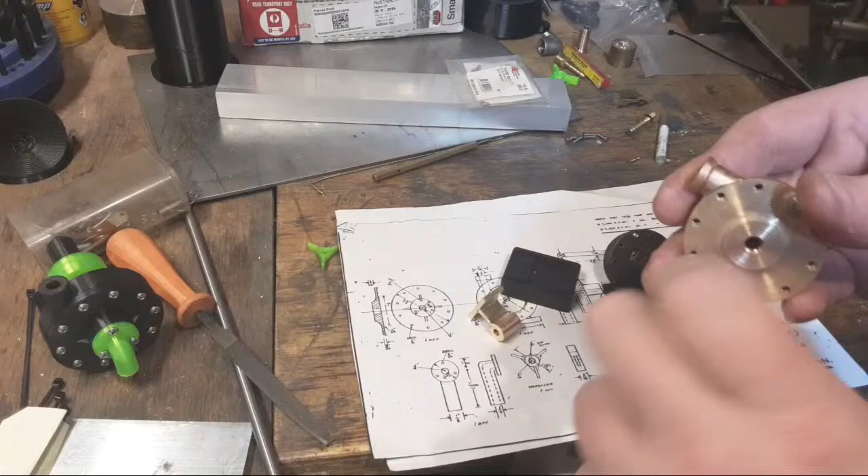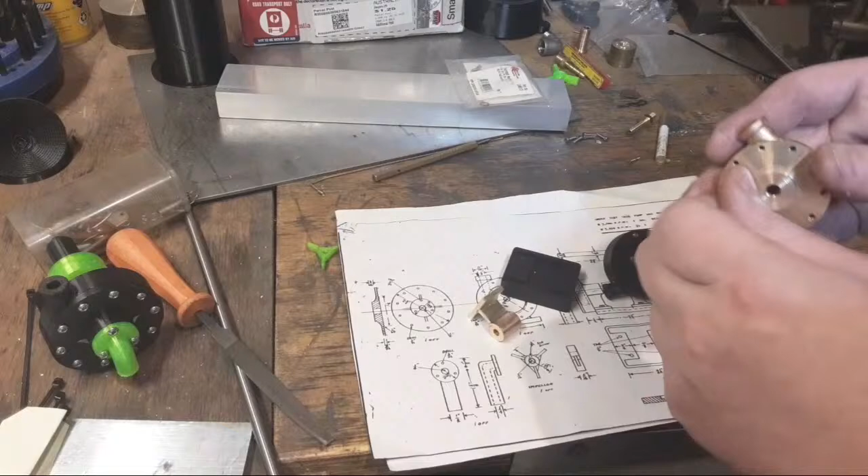Probably could have done this before. Oops, sorry about the bump. So it's got the right cavity and everything in there. I think I ported all that today at work. There's pretty much zero clearance here at the top and the back side of it where the impeller hits.

I hope I've got this right. And there's quite a bit of clearance down here. This hole here was a problem because this is supposed to have 10 holes around it. And in theory that would work if this hole was small enough, but I drilled this hole out quite big to put a fitting in it, and these touched, so what I've actually done is silver soldered a plug in there and then tapped that and ported that down as far as I can. So I think it's all pretty good.

These are all fabricated up. I did manage to get this on the wrong side of the piece of bronze and couldn't be bothered making another one, so I've actually plated that, and it's going to have a bit of JB weld in it and some nice blue paint on it anyway. That's the lid.

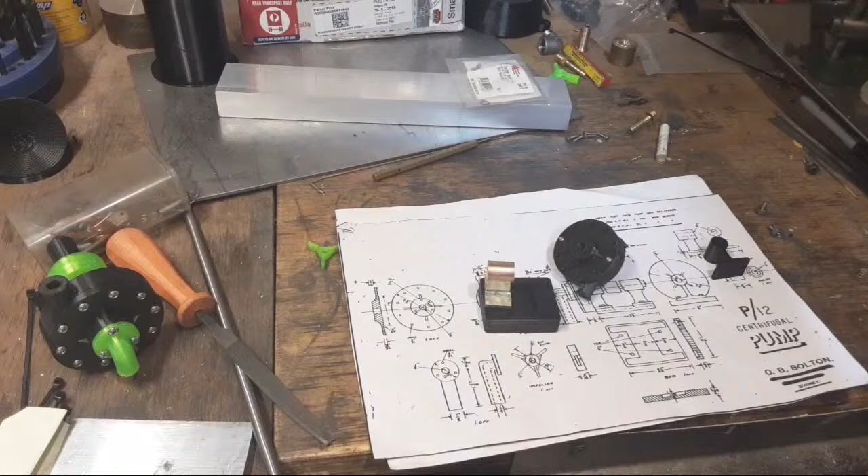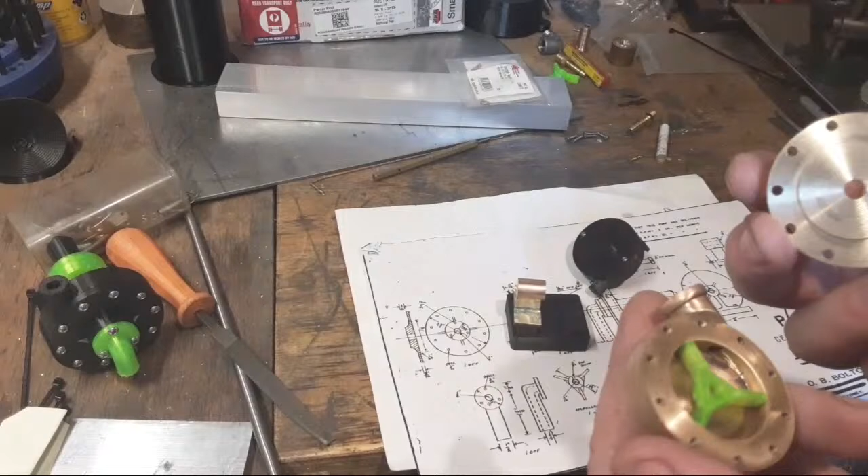Which all lines up. And that's the back standard for it, which hopefully all lines up as well. It goes on a base that looks something like this. It's not actually going to look quite like this. And it's got a pulley in between and a shaft and an impeller, which looks something like this, in bronze, I guess, or stainless steel, probably bronze. That was a good fit in there, so I don't think it'll be that tight, that close, but that's how that looks. It's got a bit of clearance, and this should fit on there like that, and it should suck water through there, I hope, and push it up the pipe. Maybe. If it doesn't, we'll have another think about it.

But that was a weekend's work. This is the P12 pump from OB Bolton in Sydney, or wherever they are now. I don't think they're actually Sydney, but this was their original drawings from the 20s and 30s, and I've scaled this down 3/4 size because as drawn it would have been like this. It's a bit big for this engine. It'd make a nice pump for a steam engine though, really nice.

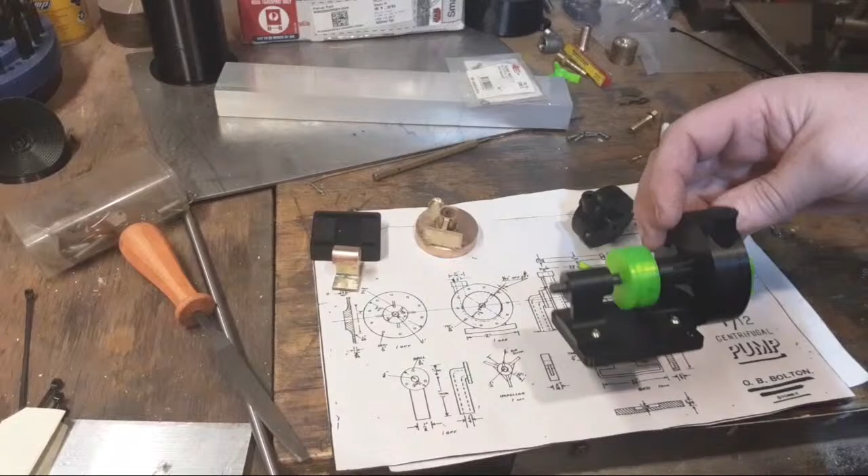Anyway, if you want - it was probably my tummy growling, I haven't actually had dinner yet.

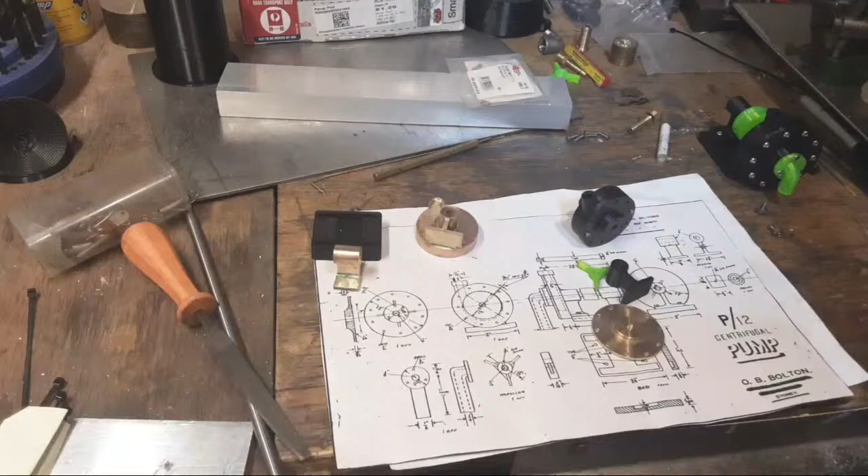Yeah, what was I going to say? Yeah, no idea. That's gone.

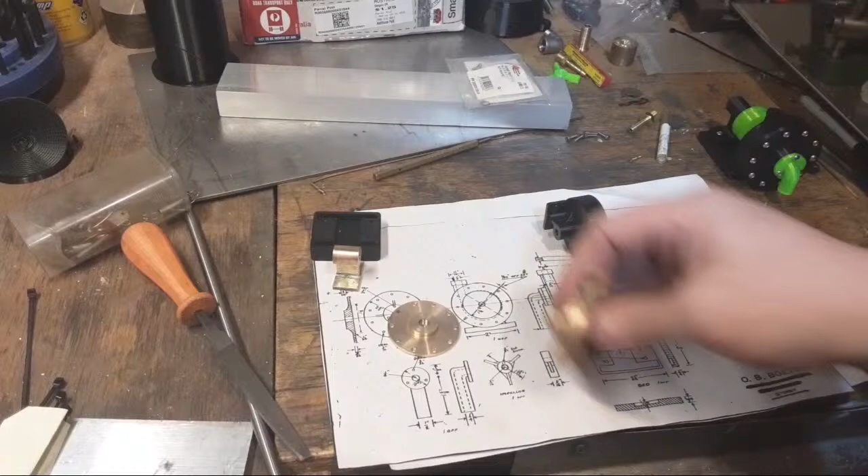Anyway, it's looking all right.

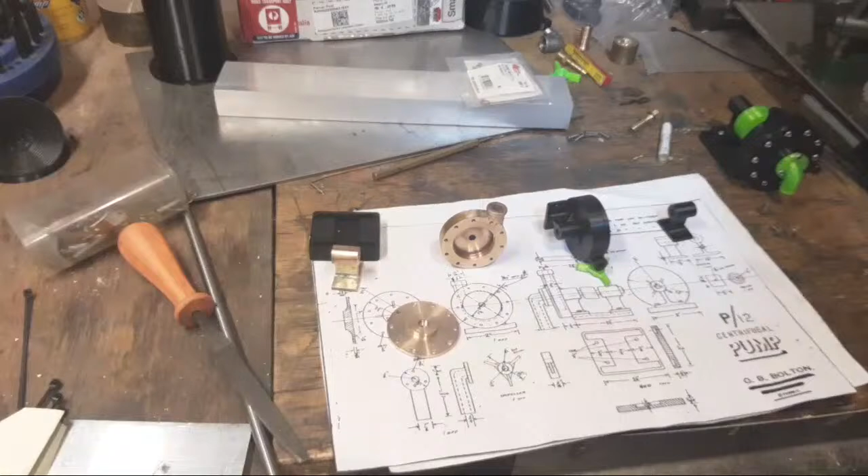So there we go. I'll put the video up on YouTube eventually. These two for the pump I might do a bit quicker than the others actually. We might put them up reasonably soon, we'll see how we go. But that's coming together nice, and that's going to be a really nice little model on its own without putting it on the engine. I hope it works.

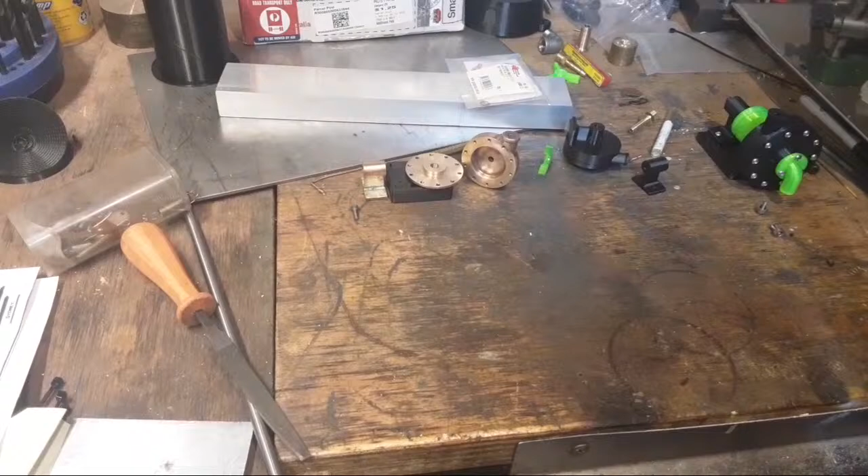Now, Man Cave sent a parcel, right? Road transport only, so you've got to wait for it. It's been a few days, don't know, might have been 10 days, I don't know how long it's been. It came from Melbourne. Sorry about that. And I haven't, to be honest, opened it.

I know Craig got his, because I saw his video.

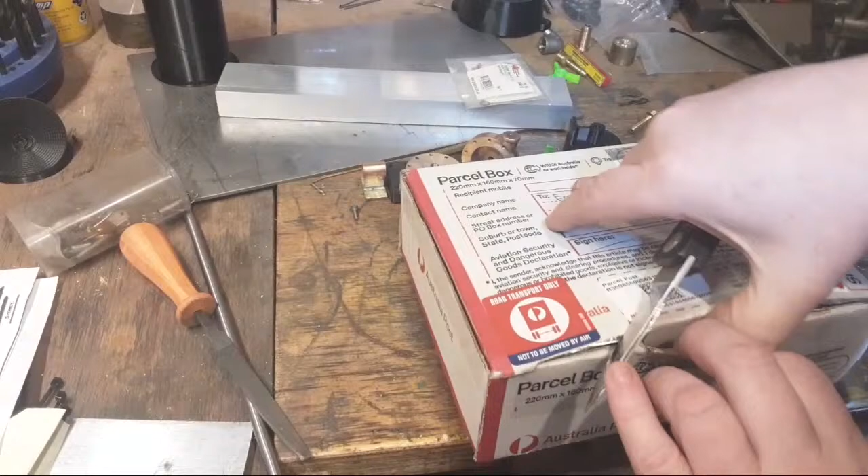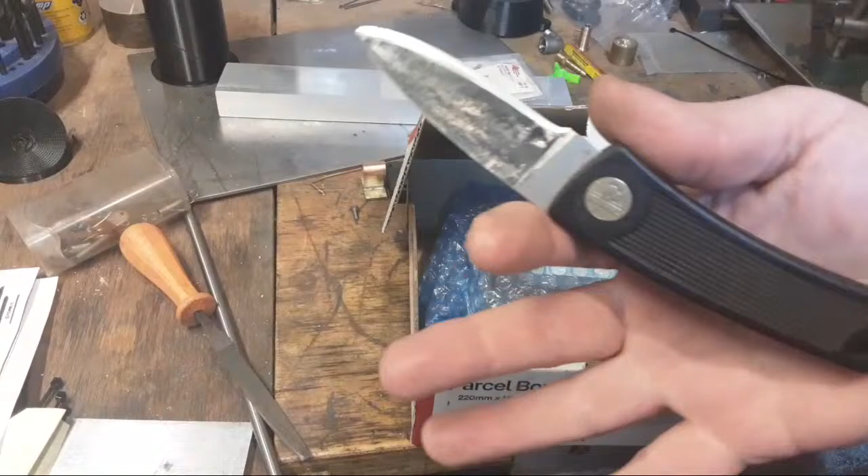Sorry about the vicious knife. That's a bolt action Gerber, by the way. It's about 15 years old, I've had it a long time. It's probably full of dirt because it used to flick.

Good knife, indestructible, lifetime guarantee. I know it's been run over by a bulldozer, but it didn't seem to worry it too much, except this little plug popped out. It was the same as this on this side, and that popped out, and we got a different one on it when we sent it back to the factory.

So apart from that, it's had a hard life. Anyway, that's beside the point. Don't know what's in here. Nothing except this bottle. New product from Man Cave.

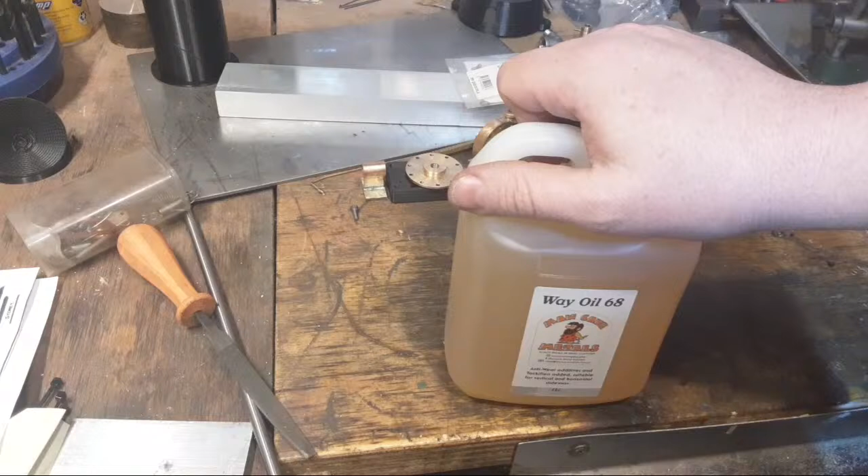I think the bulldozer was probably a pony start D9, and it belonged to a good friend of mine back in the day. So it wasn't a small bulldozer. Probably never had a cab on it, and may have by that stage had a roll bar on it, I think. And yeah, it was a scraper pusher in Tasmania. The ground was probably soft, so I might have been on gravel, I think, anyway.

No leaks anyway. This came fine with no leaks, not even a little bit. It's dry as. I believe he bottles this himself. Not sure he makes it himself, but he buys it in bulk and it's a good price. At full retail even, it's a pretty good price.

And right onto that, as soon as he said he had it, I was like, yeah, we need some of that. So I've got some of that. I've still got to find another oil can for it.

There's no like 'may cause cancer in the state of California', so we're pretty safe. It's probably really nice hair oil. It's in a good bottle. It survived the trip to Queensland, no worries at all. Nothing inside the bag, I can take my lunch to work in that bag with no problems at all.

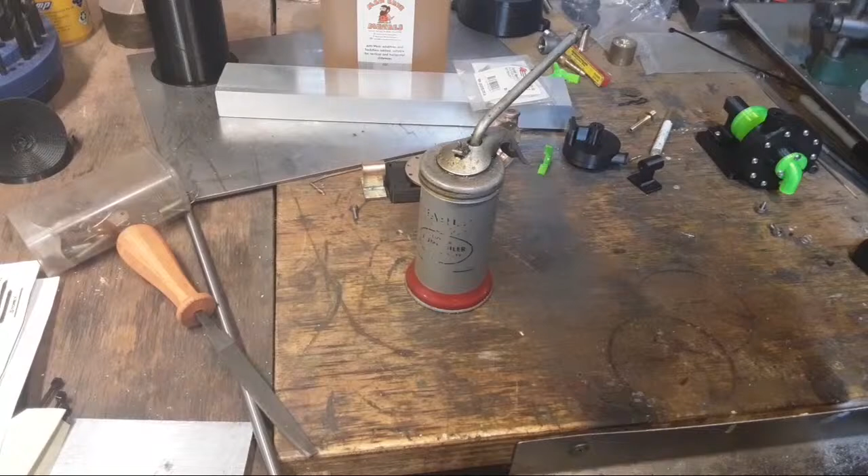I'll have to get looking for one. I haven't even thought about it. Trouble is, they're probably got to come from America, and American parcel freight's bad.

The American freight's bad. I've been waiting for a parcel from Michigan since it was posted on the 20th of last month, and it's now the 30th of this month. So what's that? It's 5, 6 weeks, something like that. And it still hasn't hit Australia, so I'm reluctant to buy an oil can from America at this point.

So these are awesome because they don't tip over and they've got a big opening to fill them up, and they don't seem to leak. So I like them. I need another one, and I'll colour code it for way oil.

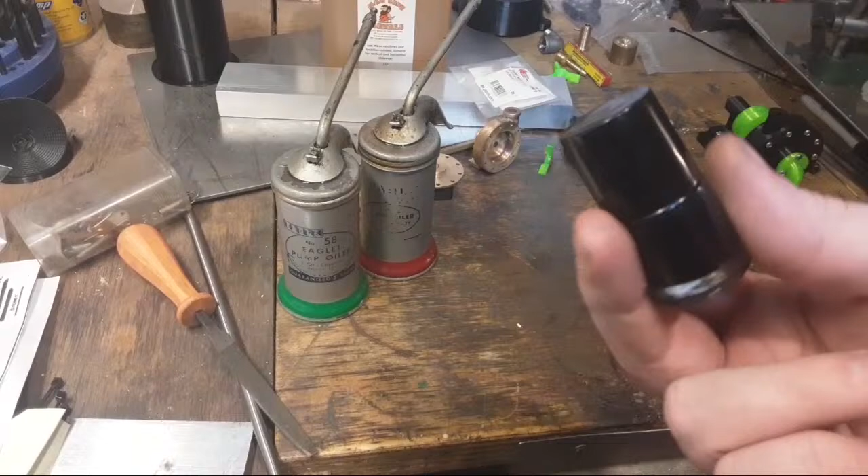Yeah, look, here's a tip, right? This is the best marking out liquid bottle. You can buy these out of China for about $1 each, right? Fantastic, pretty well bomb proof. It's designed to go in someone's handbag.

It's even got a brush. Look at that. And it's glass, so you can see how much is in it. And it's really thick glass, so if you drop it off the bench, it's not going to smash everywhere. Big fan of that.

It's a nail varnish bottle. Yep, you can buy empties. That's the answer, and that much lasts you about... I've got a litre bottle, and seriously, there's a lifetime supply there if you don't spill it. And that's the trouble with the litre bottle, is you are going to spill it, whereas this is quite good. That's my answer.

What else? 3D printer. I've got a nozzle clog, I think. Honeymoon period's over with 3D printers. I'm over 3D printers, they're not much fun. Had enough now.

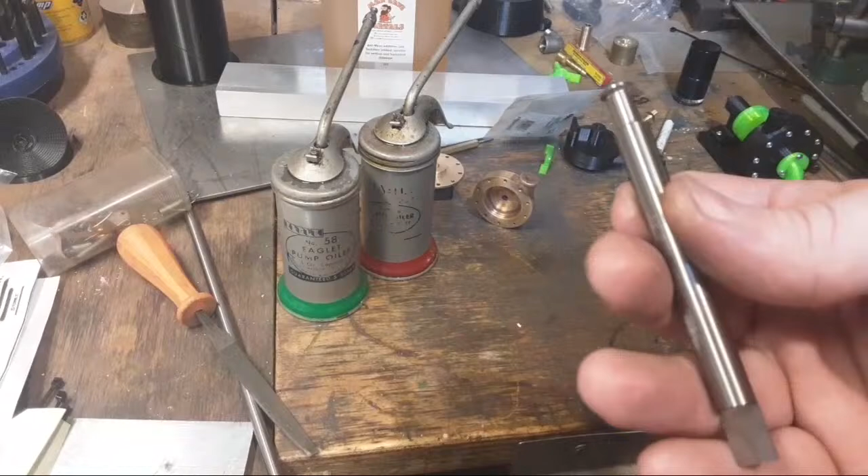That is awesome. And I had every intention of making a video. In fact, I shot about 25 minutes of video footage to do it. And I had a power cut about exactly the minute that it was downloading across the wire from the SD card to the computer, and the file seems to be corrupted at both ends, so I'm fairly unhappy about that.

So you didn't get a tool grinding video the second time around. But how'd I neck it down? Side of the diamond wheel. Not particularly difficult, it took about 5 minutes, something like that. Not a huge deal, and I'll probably use this for something else at some point. Probably I'll grind it for a proper internal threading tool or something.

3D printer worth of money? Yeah, it's really pretty good actually. It just needs some maintenance, sit down and clean it out and run it through its process again. Get it going, that's not a big deal really. I'm only really teasing when I say I'm over it.

Progress on the loco? No, not this week. Been making a water pump.

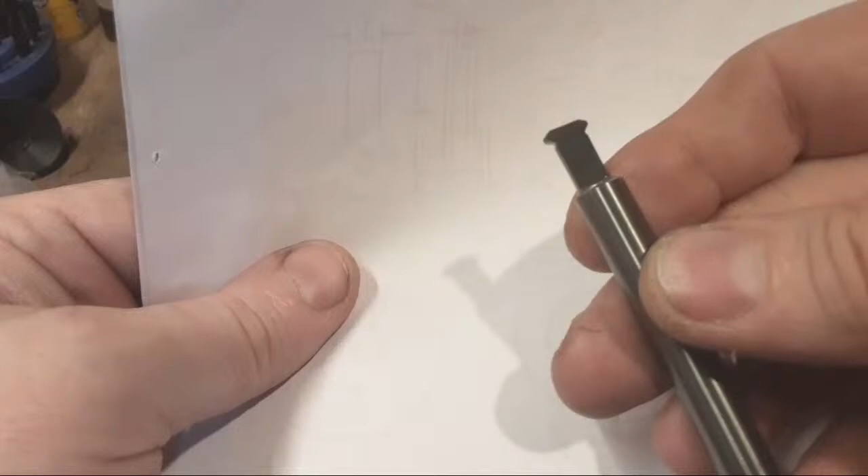Grinding this side of it's a bit of a challenge because you can't swing the head round this far enough without it touching the wheel. So I actually used the inside of the cup wheel to do that and set it like that, and that's why it might have got a bit deep there, but it doesn't matter much. There you go.

I have suspicions about it. I've seen the evidence. Unscrewing the lid, JB says. Have you ever considered unscrewing the lid? Yeah, I don't know. I think that would probably fix him, but I'd have to find another flatmate. Is that what that was in relation to?

This oil can. Yeah, this oil can's these are Eagles. They're great because you just open them like this and you can fill them up with a bottle. Riggers have only got a little hole in the top though, with either a plastic plate or a brass lid, and they're a bit of a pain, and the top goes missing and falls out and it leaks, and when you tip them over they drip oil everywhere, and usually when they land on the floor the spout breaks off there, it's soldered on. There you go.

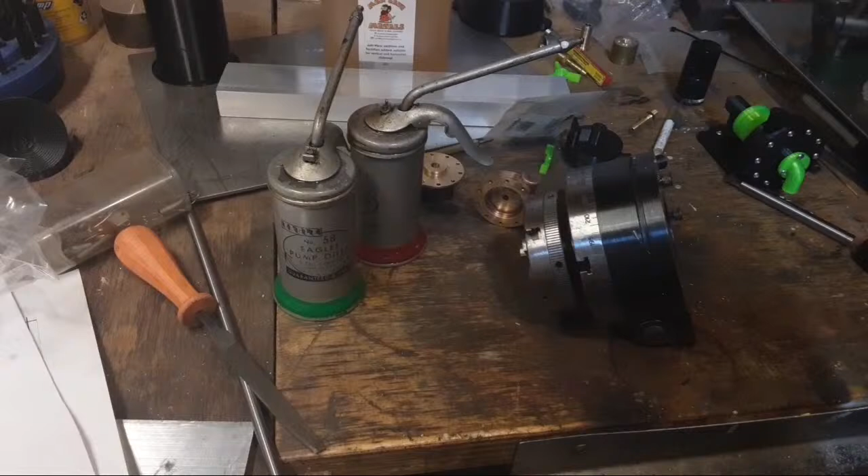Hey, if someone comes up with a nice oil can design, hey Darren, that you can make in the lathe in the home shop with some sheet metal and some sheet metal instruction in a video, I'd be happy to build one. But that's towering behind the 3 tool making projects from the TMC 2020, which I haven't even started yet. So there you go. Next year for TMC, if that actually happens, make yourself an oil can.

Congrats on the Sherlines, you're a good little machine. So anyway, this has got a bit of stuff here with 2 holes in it. And there's sort of an angle plate that comes with this from Sherline, which sort of works, but it's a bit light and it's probably cast aluminium or aluminium extrusion. And that bolts on here, and I think comes back underneath here with sort of a brace at the back. That probably works okay.

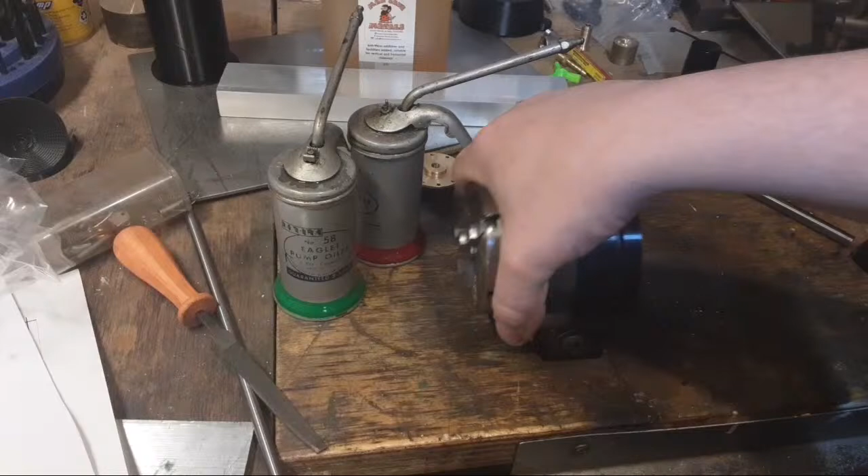What I had in mind was to put a block on here with 3 pins for a sine bar, or at least 2 pins for a sine bar, so that I can set it up on an angle on top of the vise and work radially like that. But if I put it on the front of the vise with this 3-jaw chuck on it, the table's only 100 millimeters wide, so with a 60 millimeter vise, the front of the table's there, and then this is all off the end, and that gives you travel. By the time you get an ER25 collet chuck to hold a drill or something, you've got no room for the work and no room for the drill.

Ideally, I would like something to bolt on here and probably bolt on the front of the table where there's a dovetail, I think, down there, and a couple of bolts on the side. So just probably an angle plate with a T on it, or an angle plate with an offshoot on it, so that we can bolt it on the table and bolt it on the front on the dovetail. I think it'd be a really nice option. Still thinking about that.

Hey Stephen, room for one more. Good to see ya. We won't ask about passing stones, promise.

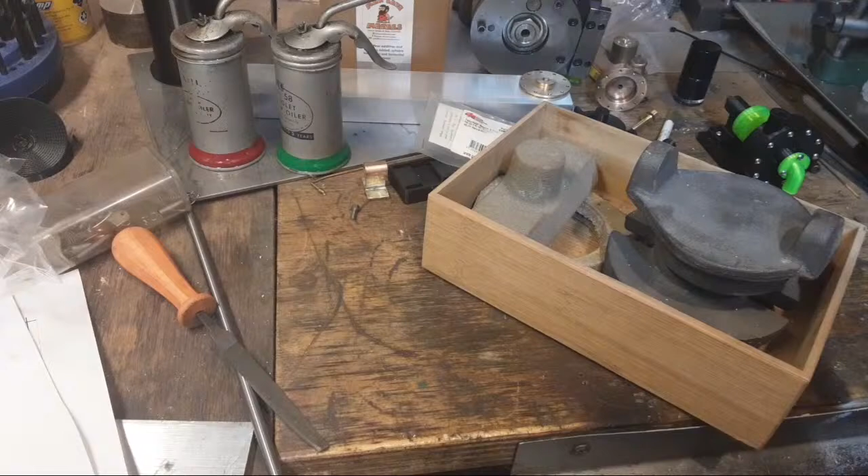Who else has these things sitting all over their workshop? Pain in that. I mean, by the time they've been used, you can't even use them as a coffee filter. There's not much use for them, but they're everywhere. That one's a week old. But tool grinding's pretty interesting, and I always enjoy tool grinding content. Please keep them coming, Stefan. We really, really appreciate the time you take to make them, because no one else really does, and we really enjoy it. So there you are, that's enough crawling.

Oh, you live in Melbourne. I at least live in Queensland. I've got a new box of them in my bag. I had to clean out, and I got rid of about 4 or 5 from last week. Anyway,

This is another project that might be on the Patreon list, right, if we get sick of models. I'm going to do a bit of a trailer on all of them, and we'll see. We're going to vote on it. But...

This is a set of castings and patterns I made 2 years ago, and probably should have got finished, but it never happened because when I got into it, I really needed a thread cutting attachment, which we sort of have, and some other capabilities which I also have now, like a milling machine and stuff, which I didn't have when I started this.

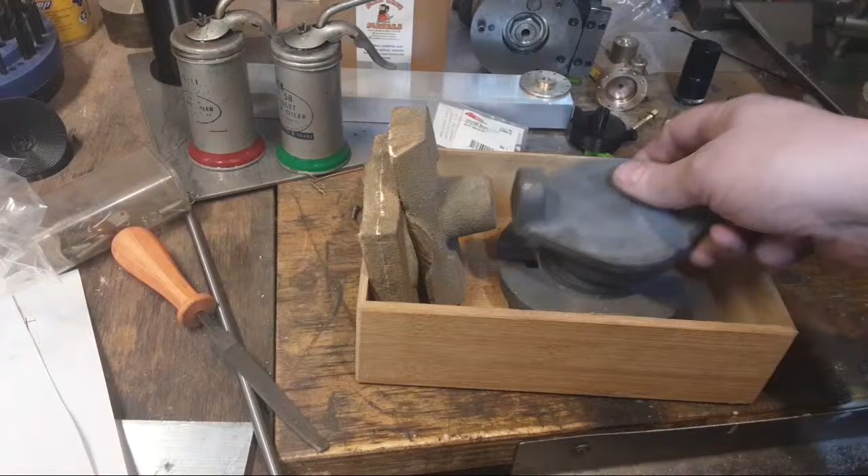So this is hashtag Renzetti's fault, if you want to go and check it out on Instagram. But...

I've got the castings, right? This is the back plate, which is about 10 times heavier than it needs to be, but I think it would machine out and be very nice. Which threads on the spindle. And this is the cam plate, which goes on the back of the spindle, and is adjustable backwards and forwards like that.

This would be the brushes, which go on this cam plate and move up and down as it rotates. And this is the other half of the dovetail, which goes in there and should slide backwards and forwards with the spindle thread on there. So hopefully it's only going to be that long on the front of the chuck, or in the front of the headstock, and it should give you potential to turn some sort of an ellipse.

So that's another project that we could get in and finish. Now we've got bits and pieces of machines to actually make it. So that's on the list anyway.

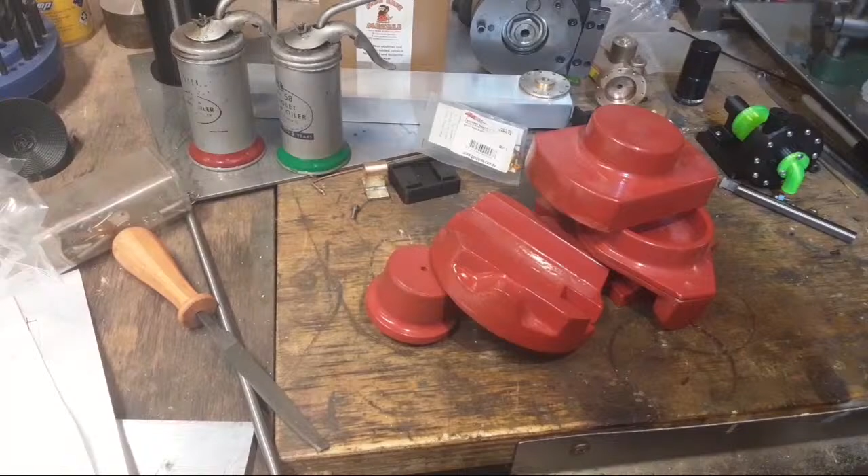This is what I have, right? That's for something else, you don't want that one. Right, this is a 2-part pattern. These are pretty nice patterns, actually. I really like these.

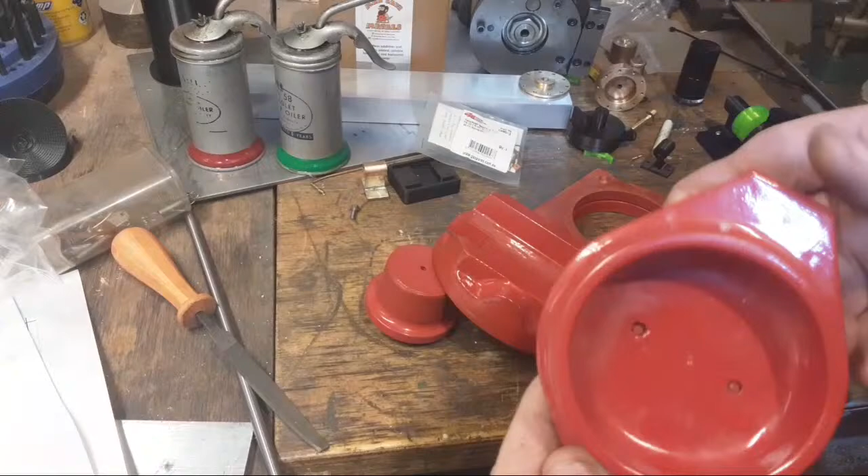Two-part pattern there for that one. 2-part pattern for this one. And a 2-part pattern for this one. And there must be another one somewhere too, I think. There's probably two more castings, I believe. So there's that one too. There's that one, and there's that one.

This is not a particularly good design. If I was casting this, I'd modify it. And this is just a piece of bar stock, so you've got something to match the rest.

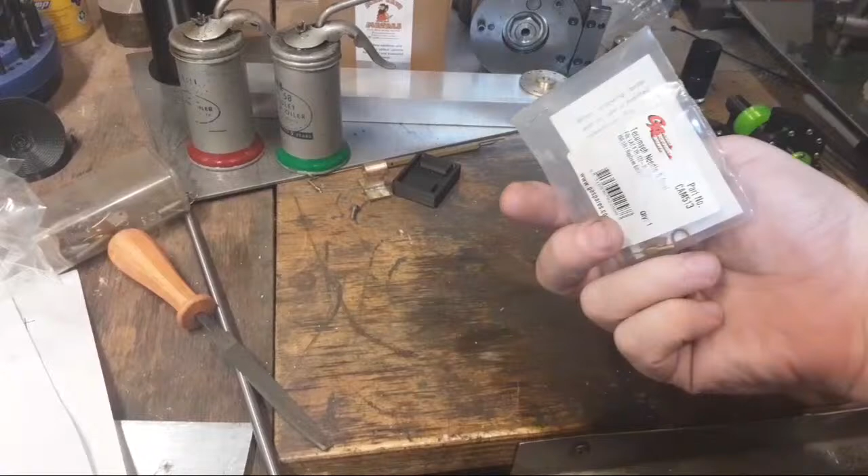No valve yet, I've got some bits. Bob, I've got a mixture valve kit, and I've got a diaphragm on the way, and I've got a block of aluminium. So nearly all the bits are here.

Yeah, I don't think he's forgotten. I think it was just a matter of work getting in the way.

Darren, because we've all got a Holtzapffel book on our bookcase - I don't actually have it, which is sad. But yeah, you want to see the drawings for this ellipse chuck? Hang on, I'll just find them. Probably.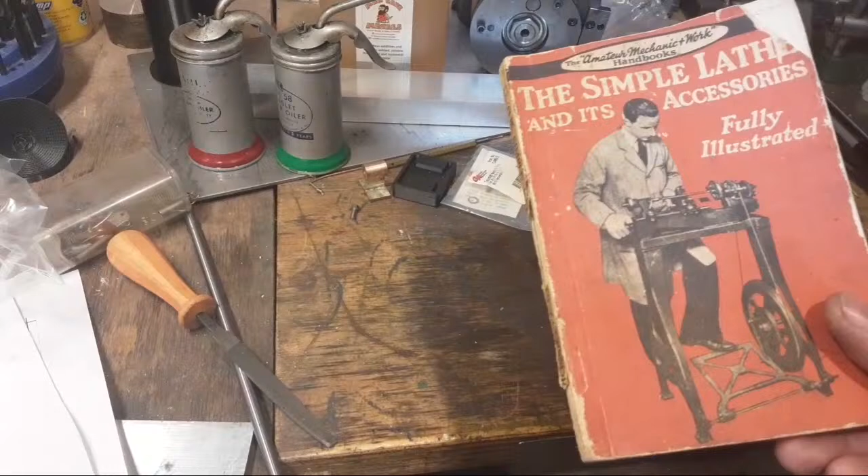Someone did already do that a couple of years ago, Craig. I have to look that out.

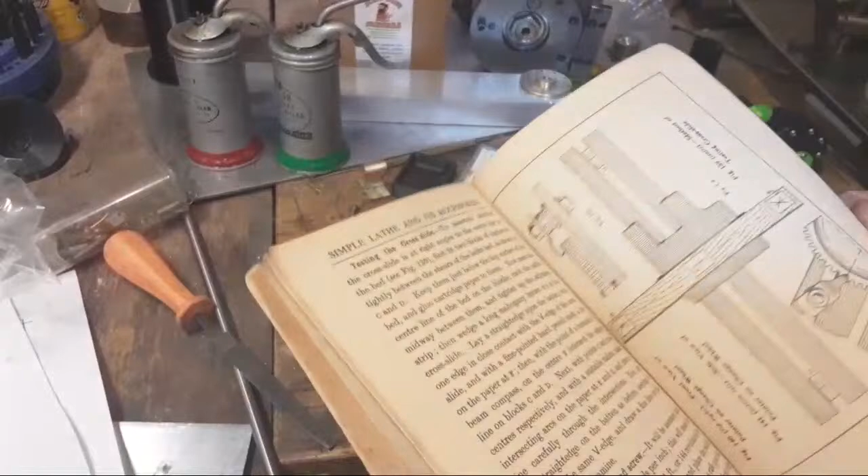Right, this is an awesome book. It will make Stefan shudder because he's not that person. It's got all sorts of cool stuff in it. It's got a drill press for the lathe and a circular saw attachment. And it's got a capstan tool holder for the slide rest, which looks like a very useful thing.

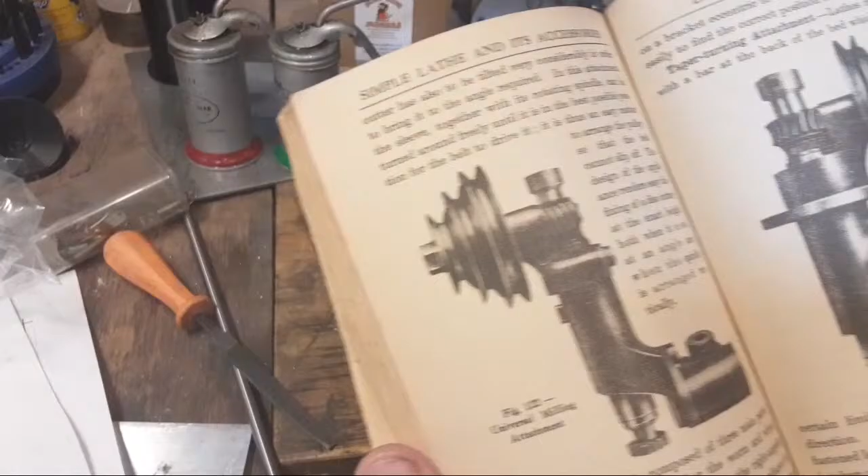It's got cutting heads and milling attachments. It's got some cool projects in here too. Look at this - this is a form relieving tool, it's a relieving attachment for making cutters. Now, that's seriously cool. I'm going to say that's seriously cool.

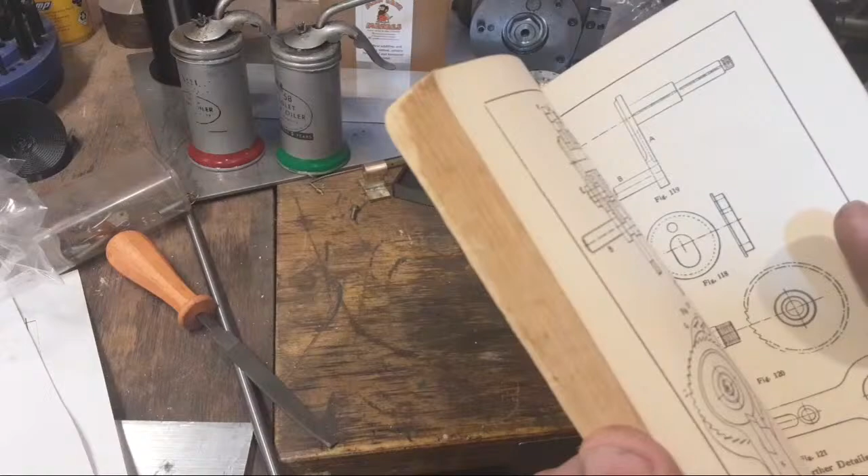Same pulp magazines, yeah, it's bought at the newsagent for £2 by the look of it.

Anyway, got overhead drives, which are excellent. Direct shades of Holtzapffel there. That looks like it could be straight out of the Holtzapffel book. Dividing attachments.

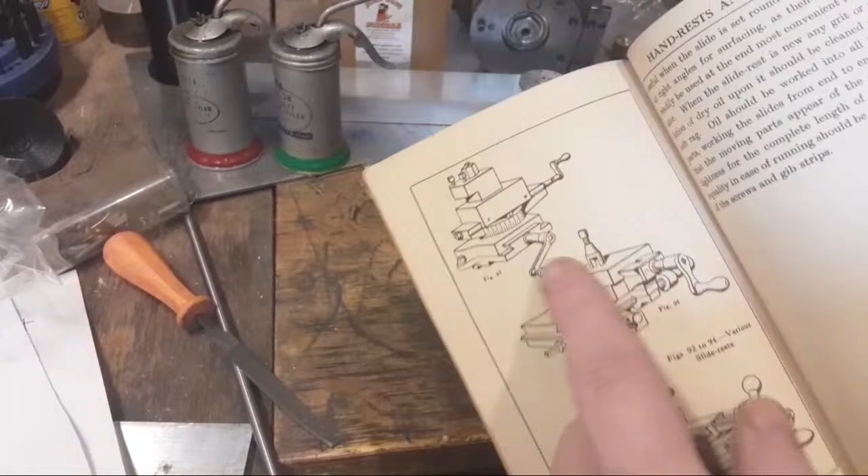Look, slide rest. Check out these. This will be well and truly out of date by 1943. Why did they even reprint this? It's got crank handles in it. That's pre-turn of the century, that's like 1880s stuff with crank handles. Box tool. Steady rest - don't ask about the steady rest.

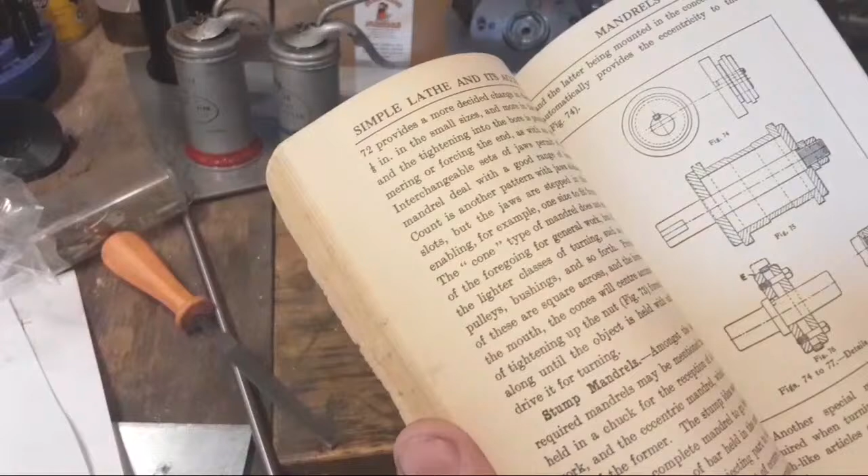Lots of cool stuff in here anyway. Pattern making. But anyway, that's the drawing I have.

Not at all, Darren. I think that's pretty worthy if you do actually make this stuff or use it.

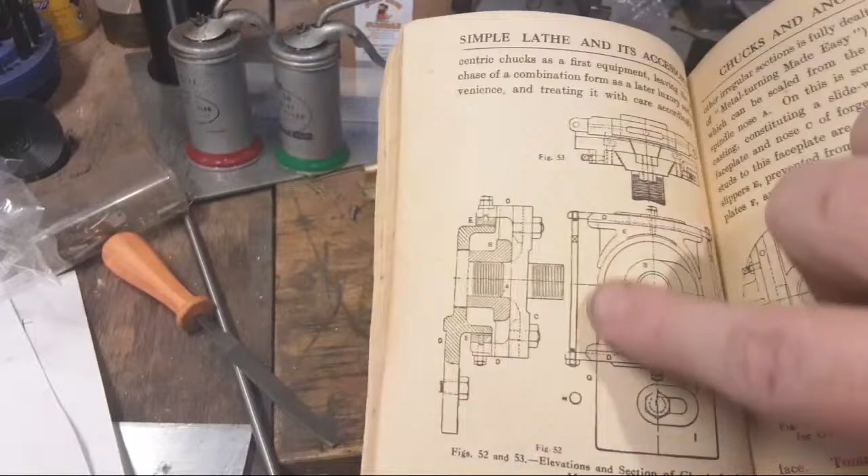Now, this is the attachment, right? And this is the drawings I had. I believe this could be streamlined and improved a little bit. Right? It's got this plate that goes on the front of the headstock with the cam ring on it, and then it's got two shoes which work on the cam ring.

What else is there? Is there another picture? No, that's it. It's got two shoes that work on the cam ring, that one there and that one there, right? And these are coupled through the slots to this piece here that slides up and down on the main back plate, which is actually threaded onto the spindle here. So are we following?

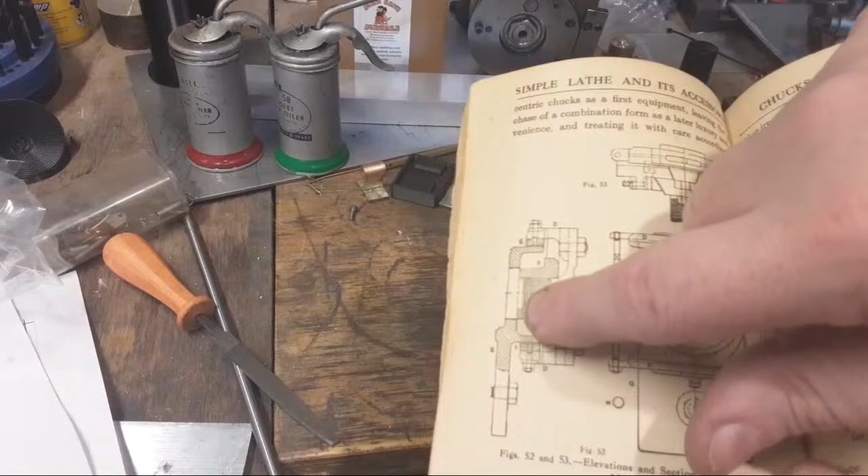And this particular back plate's adjusted, but the Holtzapffel one and the one that I'm going to put on my lathe is adjustable side to side, I believe. So still thinking about that. It's got two rods here with leaf springs across the top and the bottom to hold all this together, which I'm not sure about, and adjustment here. And this cam plate moves from side to side on this slotted hole and gives you varying degrees of ellipse as it goes round past the tool. So...

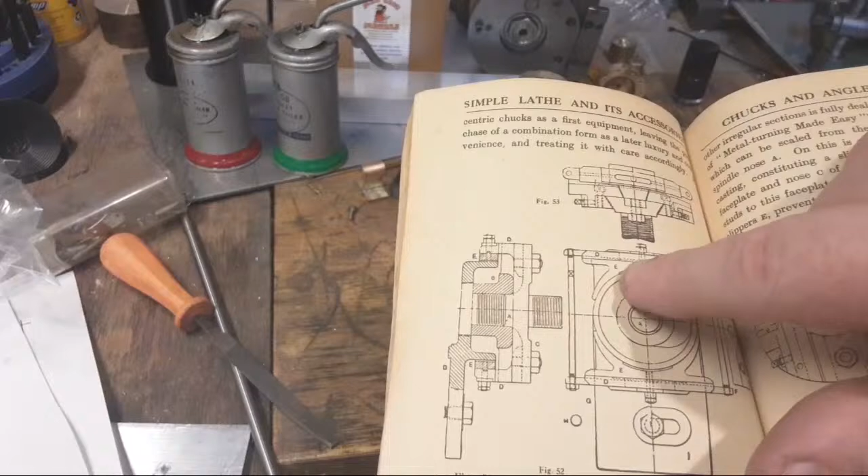The chuck doesn't actually, I don't believe, wobble like that to give you an ellipse. It just moves backwards and forwards at different parts of the stroke. You can see that piece there on the top with the spindle on the front, and then it's got two gibs in there, and then the cast iron piece on the back has the spindle on it, and this arrangement here follows on this washer thing in the back, which actually gives you your offset. So there you go, 1923, wasn't updated.

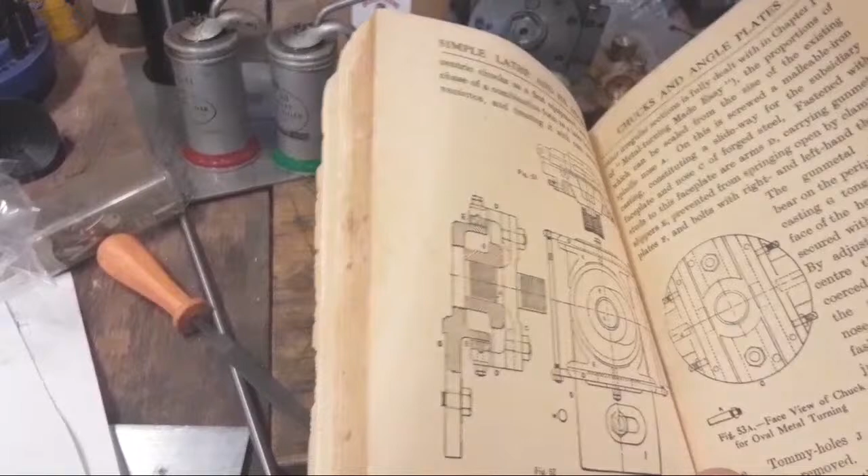So clear as mud, that's what I've got. I know how this works now, but it took me a solid week of nutting it out and drawing it up to work out what actually everything did, because there's really not a lot of information there. But another cool project, might happen one day.

What else is in this book? That looks like a treadle powered, probably a Henry Milnes or something like that. It's an English lathe - I don't think it's a Pittler. It could be a Myford, or a Drummond, but I don't think so. I'm not sure what it is.

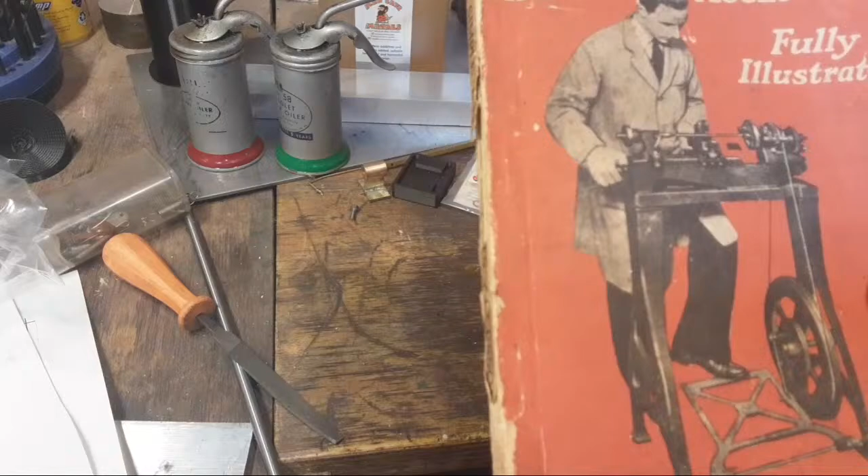It's a Milnes R-type. There you go, there's a picture of it. Now, that was out of date by the time this was printed in 1923, let alone 1943. Like, seriously, that machine was out of date at the turn of the century.

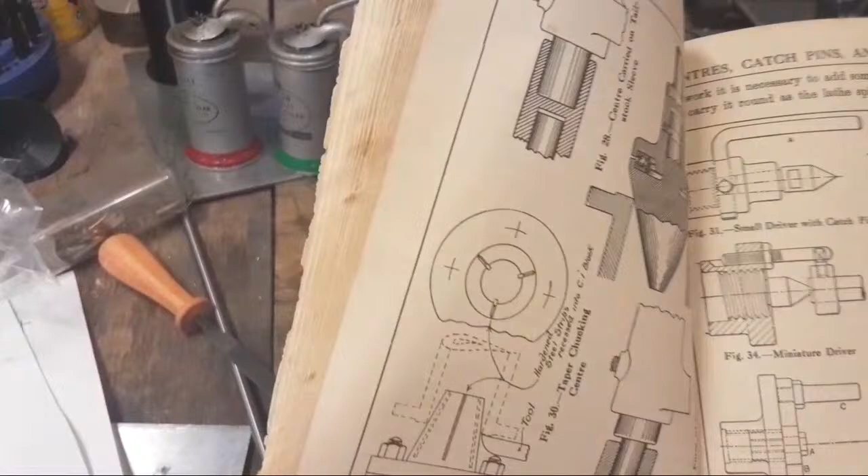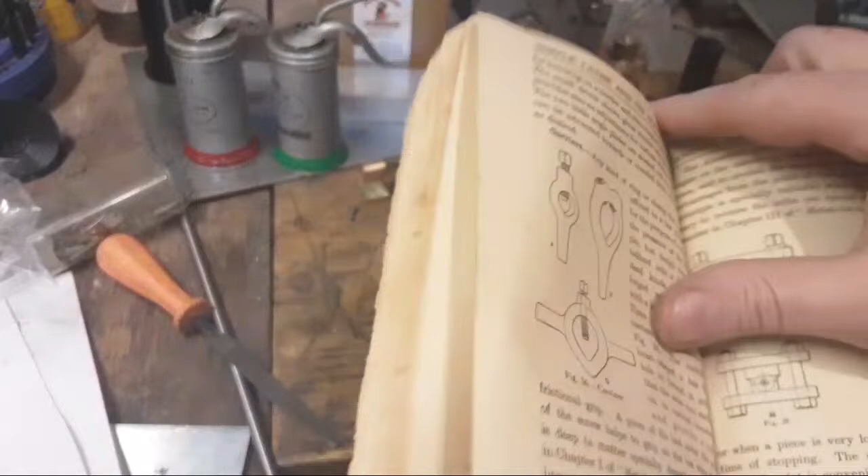Live centers - there's some technology in here. A driver for bolts. There's some pretty cool ideas, actually, and nothing's really changed a whole lot.

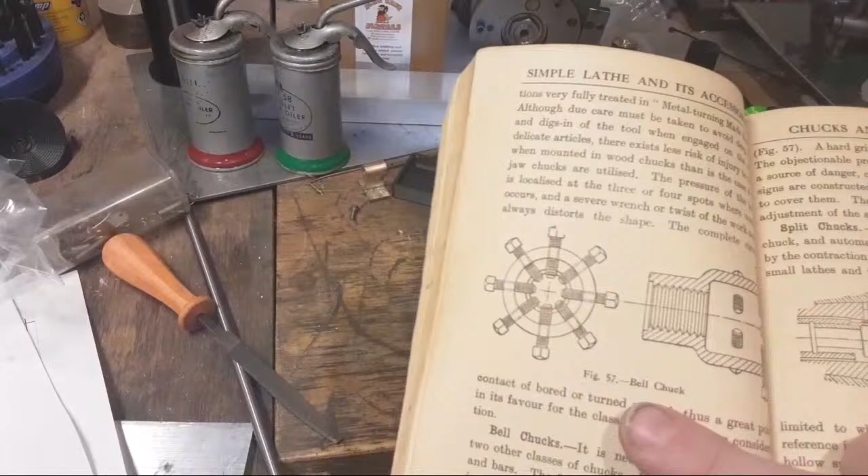Bell chuck or spider chuck - the most useless thing in practice. It really looks like a great idea, but it's absolutely atrocious if you've got to set anything up parallel and on center with it. Just a total nightmare, everything.

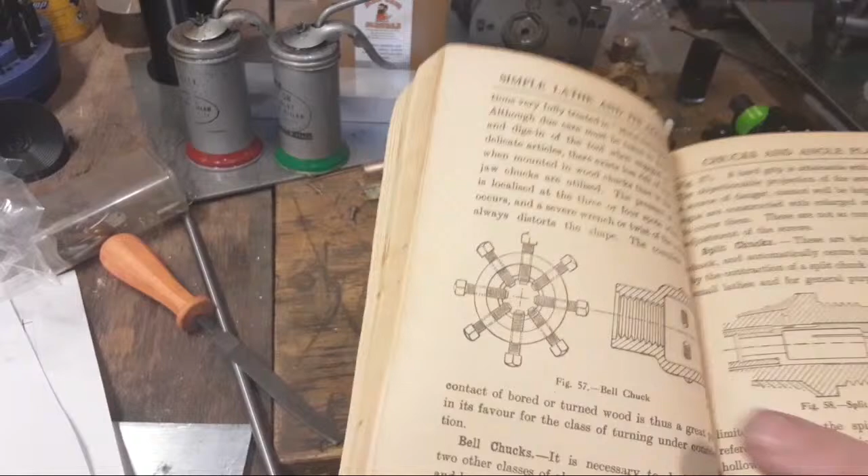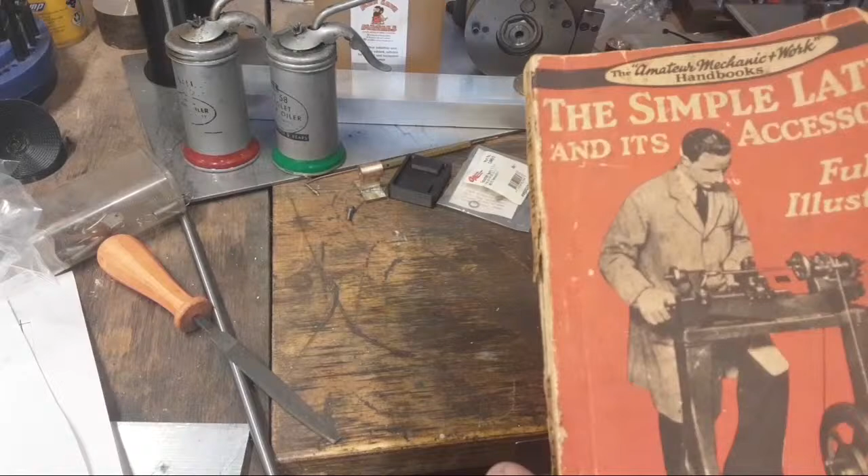Could be Tom, he's got a different haircut. Really like the dust coat and the shiny shoes, I think that really makes it. And the wide trouser pants. Celluloid collar. I bet he's wearing a pocket protector - probably the same one Tom's got.

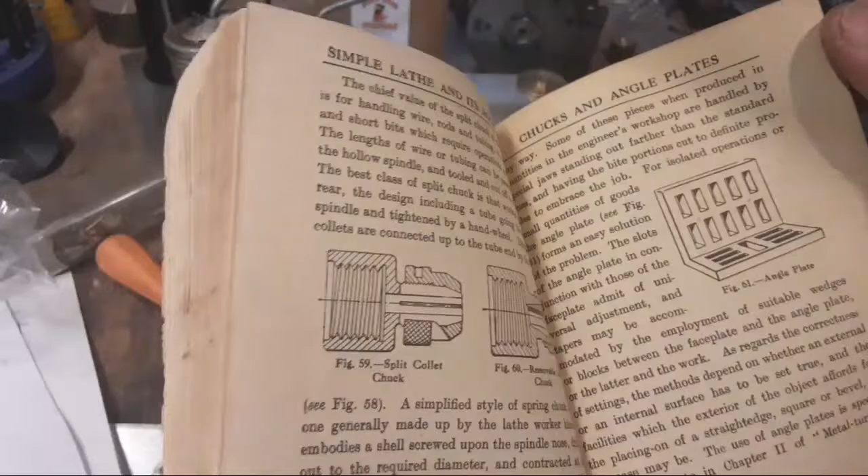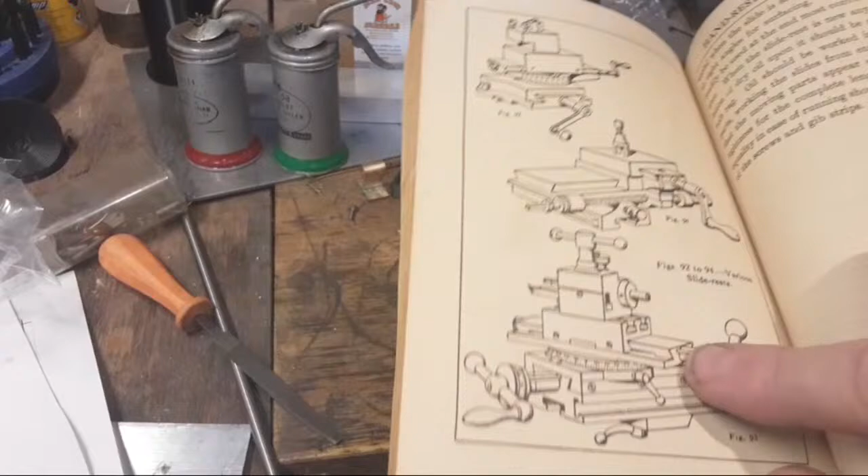That doesn't look rigid at all, even a little bit. I'm suspicious that wouldn't be much of a thing for parting, really.

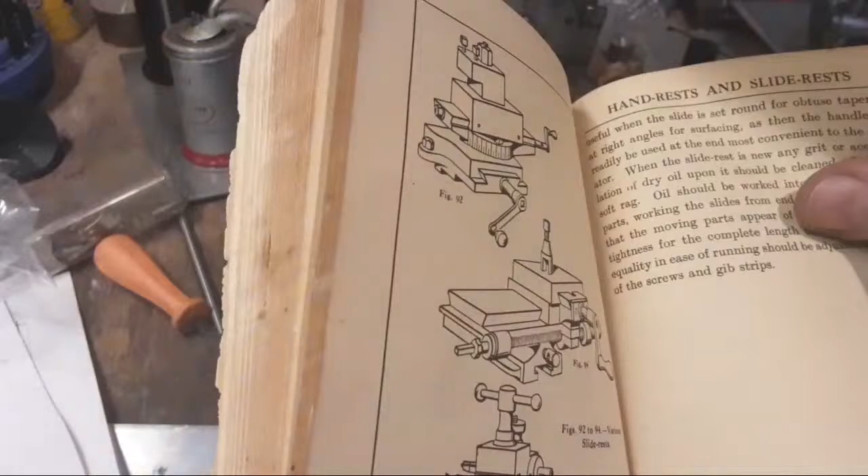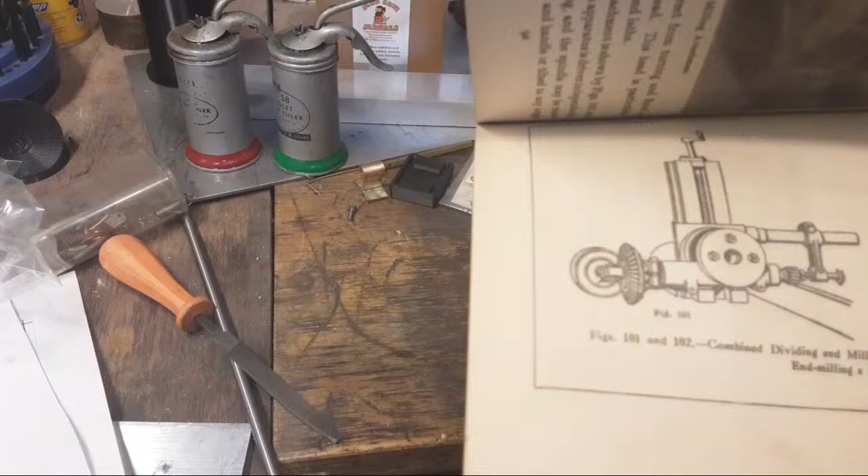Dividing head, already got one of them. Combined dividing and milling attachment, showing milling a flat and end milling a keyway. I'm suspicious that end milling a keyway in this fashion on a lathe would be pretty hard work on that lathe. It's treadle powered, but anyway.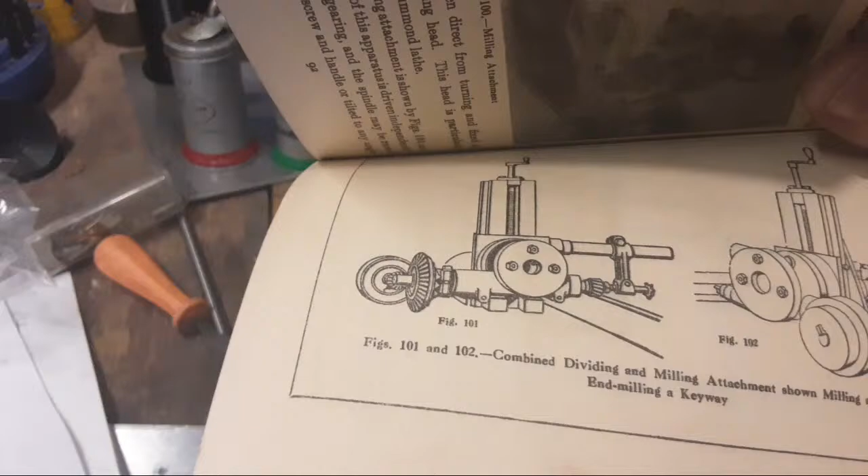I saw someone recently wearing a lab coat. John, g'day, in a video. It's quite a smart look, I think it really is. Might have been Prezzo, was it? Was Prezzo wearing a lab coat? Maybe.

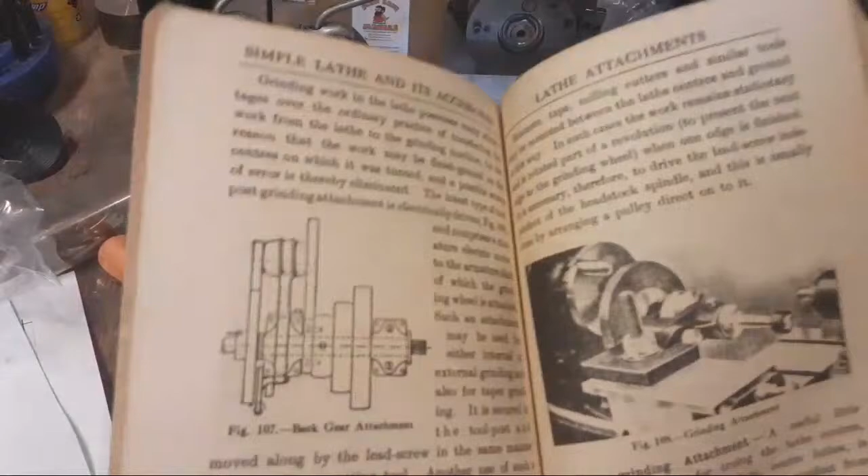Some things have never changed. Hey, Bruce. Hey, Max. Oh, Max Grant was. Yeah, Max Grant was looking great.

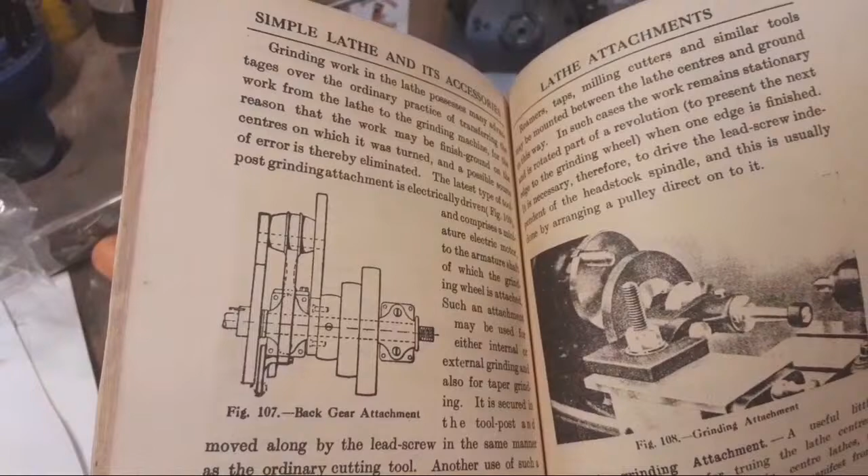Very professional, this is a post spindle. Now, castings are still available for the post spindle. I have never, ever, ever seen anyone actually use one in a video. So there you go.

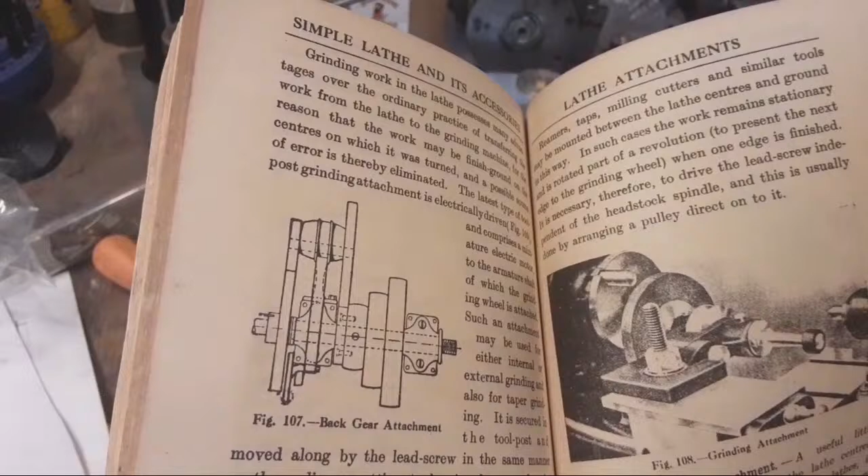There's a little adjustable height grinding spindle. Never seen one used. Someone must make these things and put them away in the workshop in the corner and never ever use them.

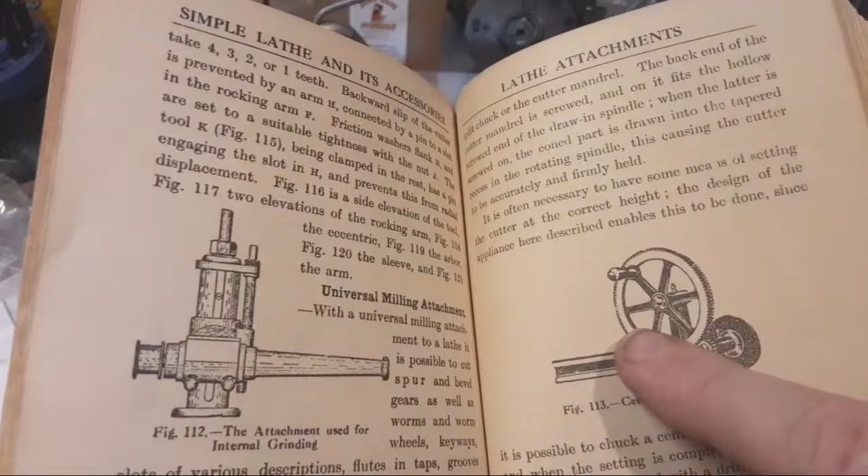See, this is like Max Grant uses. Center grinding attachment, has a grinding wheel on here, and it has a wheel and a pulley and a beam. So that's, for a tool post grinder, that's sort of how it works.

That's the other version of the pots. There you go. Darren, we missed that, but that's it. There you go. I think that's what you're talking about.

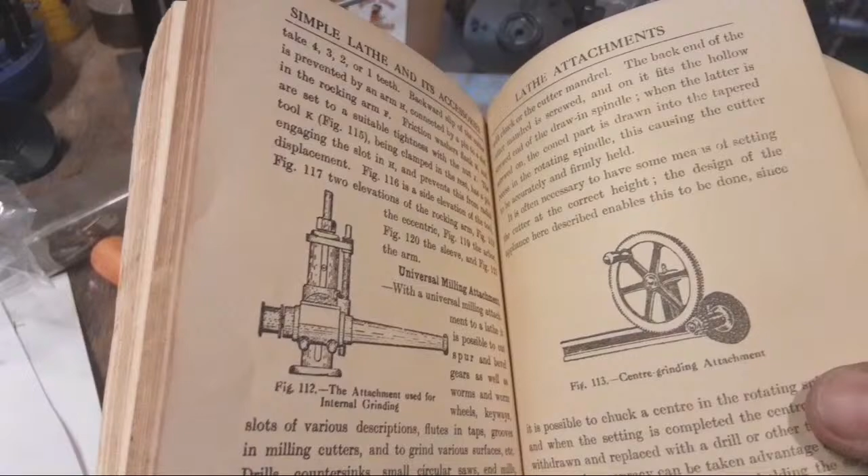There you go, but center grinding attachment's awesome. There's the form relieving tool, relieving attachment for the lathe. That's kind of cool. I'm right there with cool factor there. That's awesome.

I believe that Hemingway still make a kit for something similar. It might be a better option.

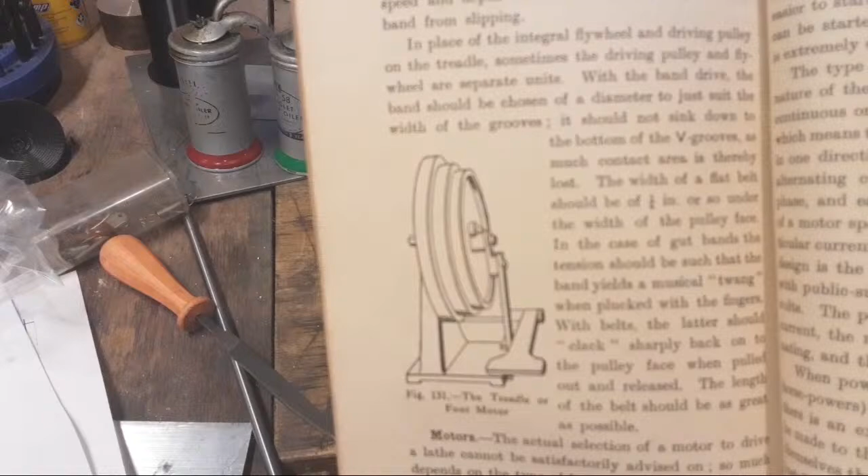There's a whole chapter on driving the lathe. Treadle foot motor, and so on. Then it goes on the wood turning lathe. And there's some actual maths about lathe feed and speeds and using a cut meter, which I've never seen in use.

So, very cool book. If you see it around, totally scruff it, because it's well worth a look. There's nothing in there that you will ever make. But anyway, take care, Stefan. Thanks for dropping in.

Tommy, torn shirts catch on fire too. Be a bit careful of that, messing around with workshop stuff. Be careful of that, just from experience there. It won't do you any good.

Anyway, that's what's happening, and what's not happening, and what may never ever happen. But some pretty cool stuff happening in the workshop at the moment. I want to get this pump finished and get this valve done for the engine so we can try starting it again.